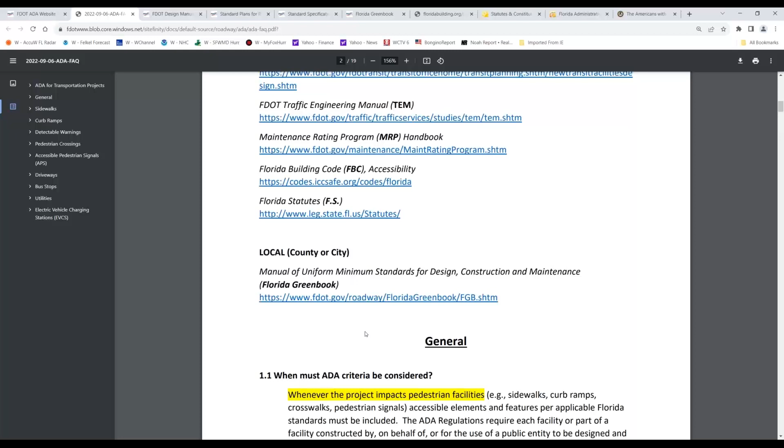I've also opened most of those links in the window you're seeing now. Here's the one for the FDOT design manual, so you could go back in time and see what the requirements were historically, as far back as the plans prep manual, which was the predecessor to the FDM. Also, this is the landing page for the standard plans.

This is the landing page for the standard specifications library. Just click on that center icon and you'll have access to the DOT spec book.

Here's the landing page for the Florida Green Book. There's lots of information available for local government entities, cities and counties. You have the Florida Building Code available from the Department of Business and Professional Regulation website, the Florida Statutes, which is a pretty easy find probably with a simple Google search, and the Florida Administrative Code.

And last but not least is the federal guidance at the federal level, ADA.gov. That's where you can find the text for both the regulations and the current applicable standards, as well as the PROWAG document, which we'll address more specifically as we move forward. I wanted to share those.

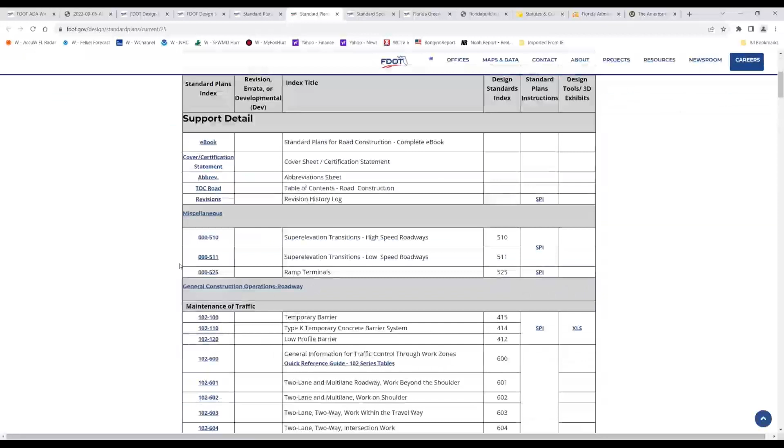And then I know that the question is referencing index 522. So 002 is the one for detectable warnings and sidewalks. So we'll click there.

And now we see on the first sheet, this is sheet 1 of 7 for this particular index. There's a stub, if you will, of the crosswalk markings that's provided in the diagram labeled curb ramp nomenclature. You can see the stubs are perfectly in line and parallel with the direction of the ramp, or vice versa.

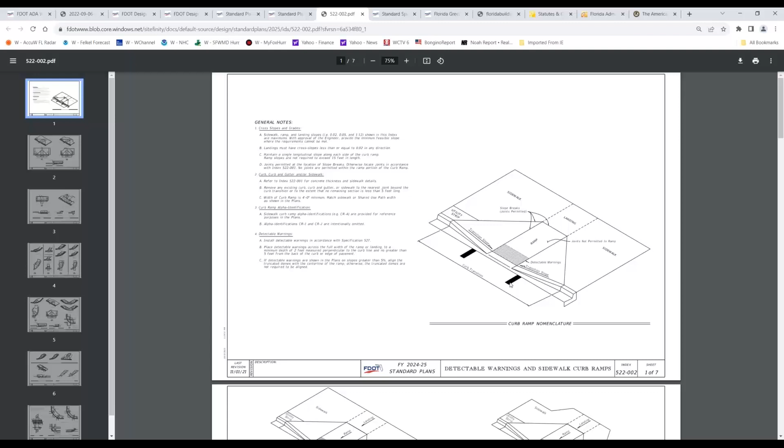I believe this is probably the only picture within this 7-sheet detail or standard that actually shows the crosswalk markings, and that's intentional because these are standard details, and the number of variations that are going to occur around the state from intersection to intersection, and probably within the same intersection from corner to corner, the amount of details are going to vary so significantly that there is no way whatsoever that the DOT could provide a standard plan solution for every possible scenario.

So the expectation is that engineering judgment is going to be applied by the engineers who are contracted by the DOT to provide design plans. And those engineers, as they exercise their engineering judgment, are going to appropriately apply the appropriate detail for a curb ramp. So I believe that answers the question.

So is 522 going to be modified to show inline crosswalks? The answer to that most likely is going to be no, not beyond what I just explained. And if not, is there a selection process? The process is that the engineering community is going to have to exercise appropriate engineering judgment for the appropriate and proper application of these standard plan details.

And then beyond that, they're going to have to expand and provide additional details as appropriate for each site-specific location. Because again, standard plan details are a pictorial representation of the absolute minimum values that can be accepted on the state highway system. Beyond that, the expectation is that the details will be provided by the engineer that are site specific.

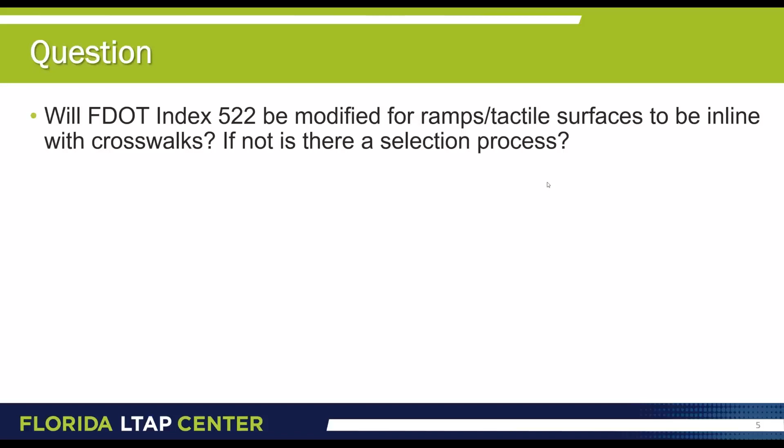Okay, the next question says, do you have suggestions to local agencies for ADA compliance during temporary traffic control and maintenance of traffic to improve safety? And the answer to that is, from a statewide perspective, I would encourage the audience to reference FDM Chapter 240. That's going to be the Transportation Management Plan chapter, and it goes into some level of detail there about what the expectations are for the engineering community and the transportation industry in general for applying appropriate details for temporary traffic control.

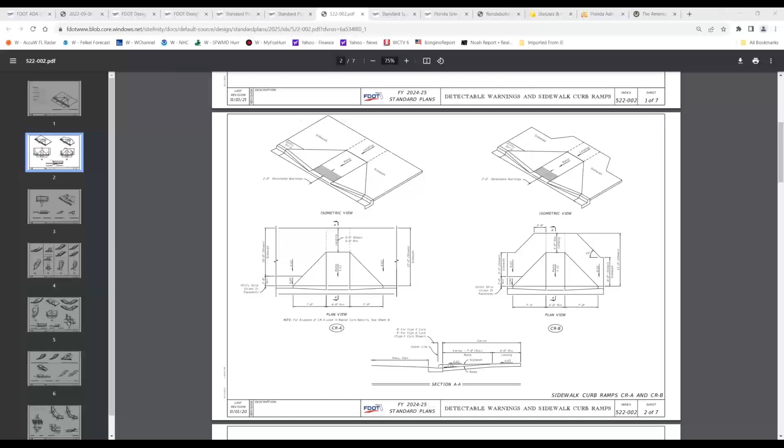Also, I would direct your attention to the specifications for temporary traffic control expectations from the DOT, and let me pull that reference up here. So I'm going to kill that one. We'll go to the standard specifications, click on the icon, and now I'm just simply going to search for Americans with disabilities. And it takes a little bit because it's basically having to download the entire volume of the spec.

But hopefully here on the screen, as I read through this, you'll understand what the expectations are. In Standard Specifications Index 102-3.4, which covers pedestrian and bicycle accommodations, the expectation is that, remember, the spec book is directed to the contractor. So the contractor is directed to provide accommodations for pedestrians as shown in the temporary traffic control TTC plans. So that first part of that sentence says very explicitly that the expectation is that there will be details in the plans, in the project plans for temporary traffic control that the contractor can build.

So this was a change that occurred, I think, about 3 or 4 years ago to the specifications that made the engineer of record for the project responsible for providing temporary traffic control details in the plans. Prior to that, it was the contractor's responsibility to provide pedestrian access during construction. But that was changed about 3 or 4 years ago. And now we have an engineering plan centric responsibility for TTC for pedestrians in the plans. And we can discuss that further if anybody has any questions about that.

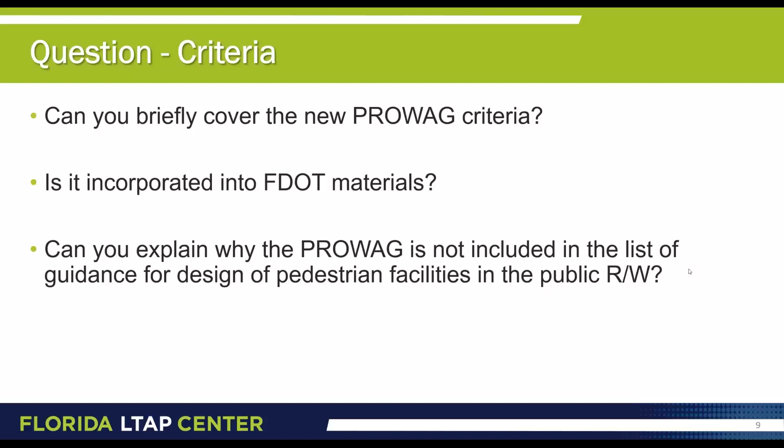Okay, the next question - and Sam and Kristen or Kiriana, if we end up getting some live questions relevant for the particular topic being discussed, you can just break in and let me know, then we can do it that way too. Hey Brad, well since you paused, I will jump in with a question that we received.

Perfect. This question is about the ladder bars crossing a wheel path: are preformed thermo required in high emphasis crosswalks, or can extruded thermo be used?

That is a very good question, and unfortunately that is beyond my area of expertise. That's getting more into a materials issue, something specific that the central office traffic engineering and operations folks can probably answer a whole lot better than I could, because I'd just be speculating. So I would definitely encourage you to reach out to our traffic ops office here in Tallahassee to ask that question.

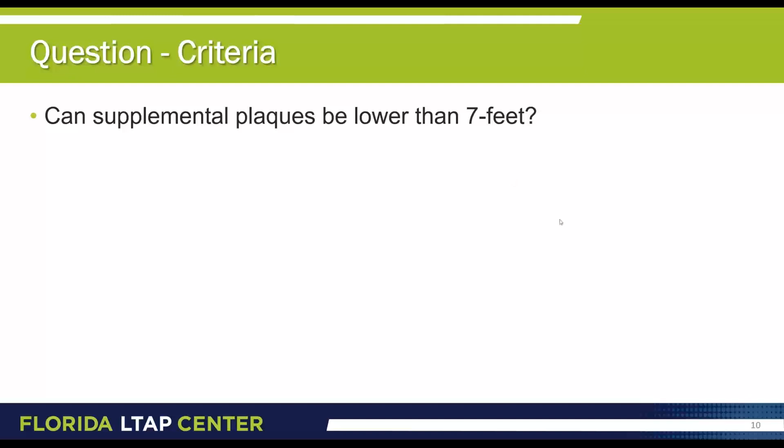So the question that's on the screen now, the question reads, can supplemental plaques be lower than 7 feet? This is specifically a reference to the vertical clearance requirements over the walking surface of pedestrian facilities.

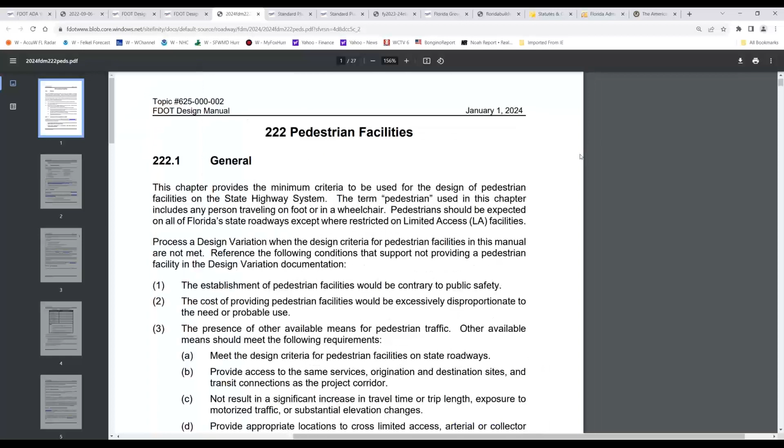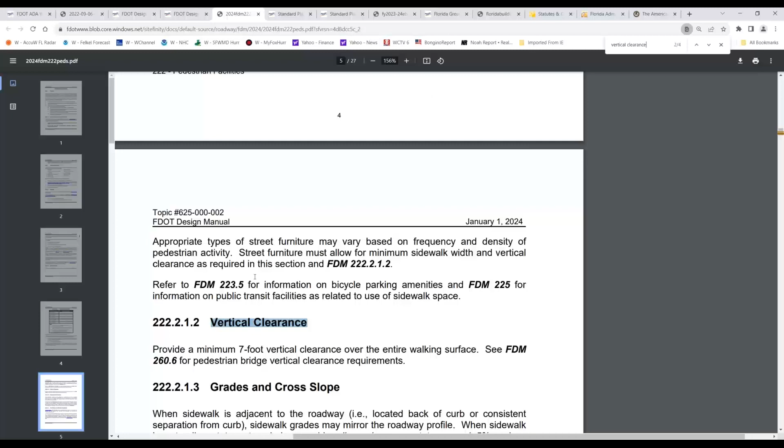So we're going to go back to the FDOT FDM, the FDOT design manual, go to chapter 222. As I mentioned before, Control F is a fantastic tool. So I'm going to hit Control F and type vertical clearance. And that brings us to section 222.2.1.2 for vertical clearance. It says provide a minimum 7-foot vertical clearance over the entire walking surface.

So essentially, to answer the question, there are no exceptions to this 7-foot vertical clearance to fixed objects. That 7-foot vertical clearance is for the entirety of the walking surface width. So if you take the neat lines of the walking surface, whether it's a concrete sidewalk or an asphalt shared use path, and you extend them vertically to a point 7 feet above the walking surface, that entire clearance window has to be clear of any obstructions. So that's nothing piercing that window either horizontally from the side or vertically from above. That entire window must be completely clear over the entire walking surface.

The next question is, what is used in the median if the sidewalk is 10 feet or more to prevent motorists from using the area to make U-turns?

This is an interesting question, and I haven't heard of this ever being an issue. To this point, maybe no one has utilized a full 10-foot width in the median pass-through. But my answer to this is that if it were to become an issue or a concern during plans development, then I would definitely encourage the engineer of record to have a conversation with the district project manager on that.

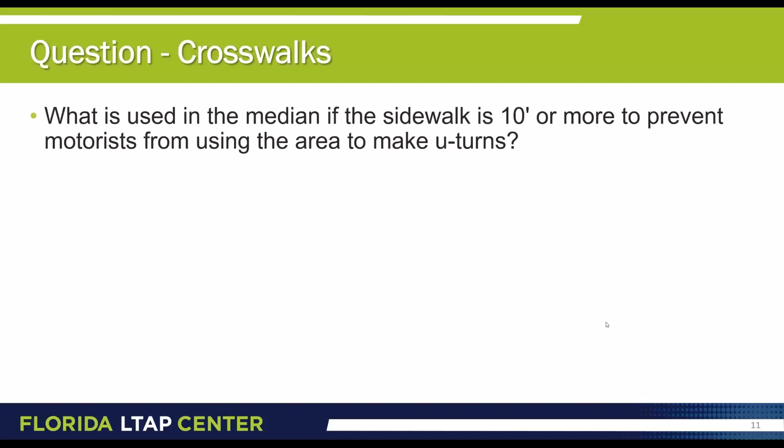So, is there a minimum distance the sidewalk can be constructed when the road has flush shoulders? That is going to be answered in the FDM. I'm going to pull that window back up, go back to chapter 222, and it's going to be an early section here. So I'm going to section 222.2.1 for sidewalk. This is the FDM, chapter 222, section 2.1 for sidewalk.

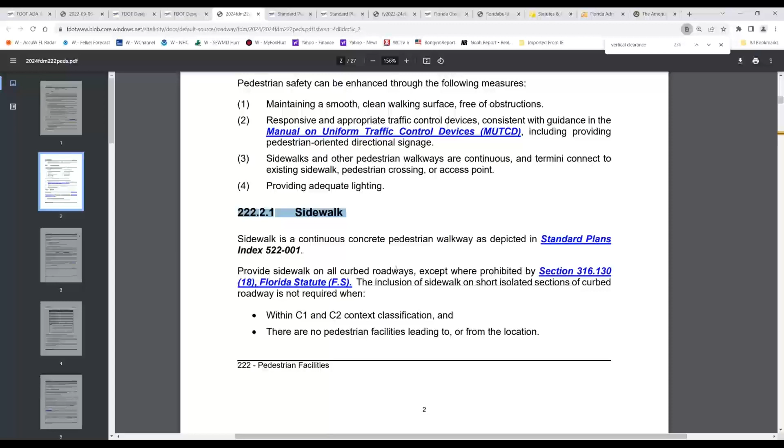And the sentence that I was thinking about is right here in this paragraph. It says sidewalk on flush shoulder roadways is not to be constructed directly adjacent to the roadway or shoulder pavement. So what that says to me is that the sidewalk for a flush shoulder roadway must have some separation from the edge of pavement. Now, there's nothing here that specifies what that separation has to be as far as distance or material. So there's flexibility given to the engineer to exercise engineering judgment and the competence in their practice to make a choice. But if you have any concerns at all, then definitely you would want to discuss that with the district PM.

And Brad, there was a question: what about vegetation within the vertical clearance? Oh, perfect. Thank you, Sam. I should have mentioned that as well.

But the clearance to fixed objects, as I stated a moment ago, is 7 feet, and that's over the entire walking surface. The clearance to vegetation, tree limbs and other vegetation types, is 8.5 feet. So again, if you extend those neat line edges of the walking surface vertically up to a point 8.5 feet above the walking surface, then that entire window encapsulated by that rectangle, that clearance window, must be free of any obstructions, either from the side horizontally or from the top vertically. Thank you, Sam.

Okay, I had a comment come in that someone saw a four-wheel truck use a median with extensive landscaping to make a U-turn, and it doesn't seem that the landscaping was enough of a deterrent for that U-turn. Well, those kinds of situations, it's impossible to design for people who are just going to ignore all norms and laws. So we do the best we can as the state transportation agency, but we can't design to prevent everybody from doing whatever level of foolishness they want to engage in. But thank you for that comment, Kristen.

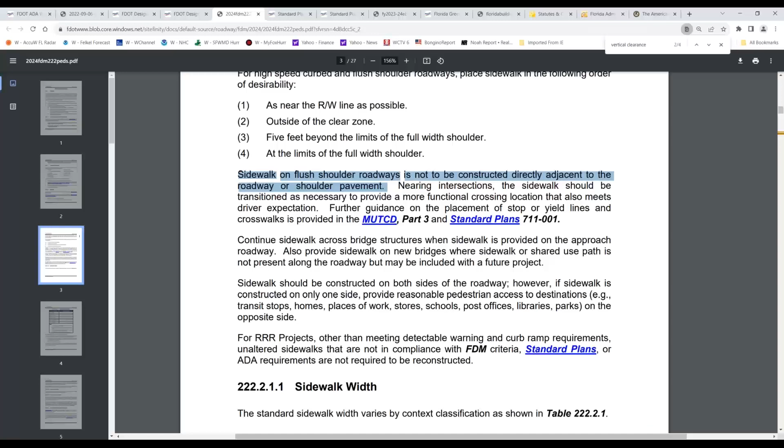With that, if you're not adjacent to the roadway, let me pull up that reference. I'll go back to chapter 222, and search using Control F for the word 'mirror.' It states in chapter 222, section 2.1.3, for grades and cross slopes, that when the sidewalk is adjacent to the roadway—that is, located back of curb or a consistent separation from the curb—sidewalk grades may mirror the roadway profile. That's for the mainline sidewalk considered adjacent to the roadway.

So to readdress the question: except for that situation where you have a mainline sidewalk adjacent to the roadway, are there any situations where sidewalk grade can go more than 5%? The answer is no. Above 5% is considered a ramp, with ramp limitations being greater than 5% and less than or equal to 8.33%. So any grades not adjacent to the roadway that exceed 5% up to 8.33% are considered an ADA ramp, and you'll have to apply handrails, level landings, and vertical rise limitations of 30 inches, I believe.

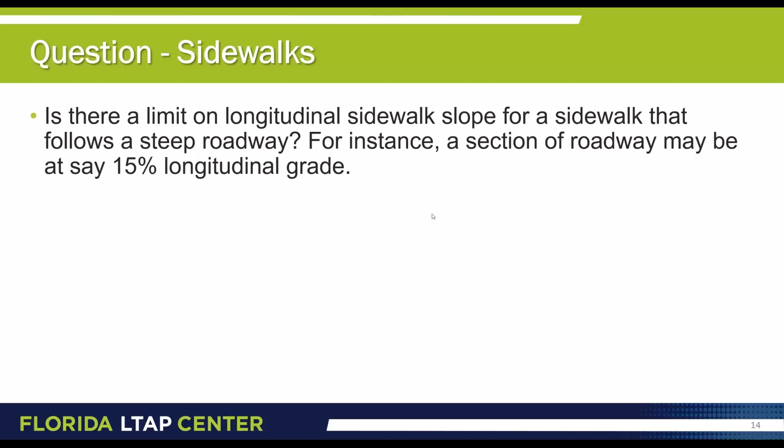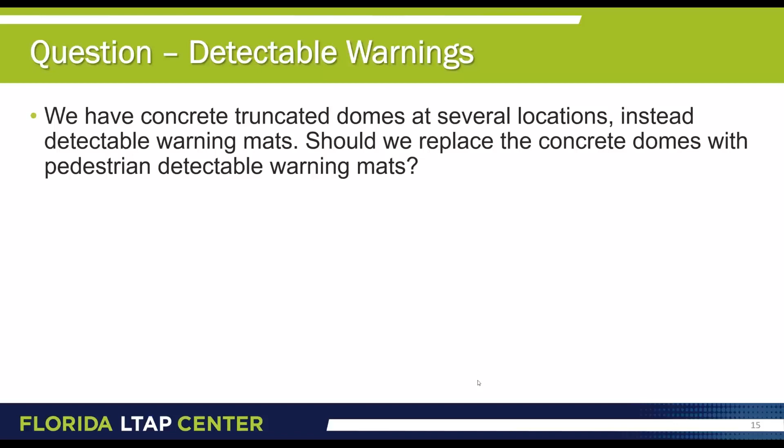The next question is, we have concrete truncated domes at several locations instead of detectable warning mats. Should we replace the concrete domes with pedestrian detectable warning mats? I would say the answer, unfortunately, with this limited information provided, is going to be it depends. And the reason I say that is because if you have a 3R project on the state highway system, then the answer, the depending part, is absolutely yes. You have to upgrade the detectable warning surfaces to current standard, because that was a historical agreement between the Florida FHWA division and the FDOT, and that memo is actually available on the FAQ document, which I'm going to pull up here.

Back here at fdot.gov/roadway/ADA, if you click on the FAQ document, which is the first resource or first link under the resources header, then you can scroll down under the national reference list here, and there is a—let's see which one it is. I have to remember which one it is. I know it was signed by, on the federal side, by Mr. Richter. So you see how useful Control F can be when you're looking for information in these documents.

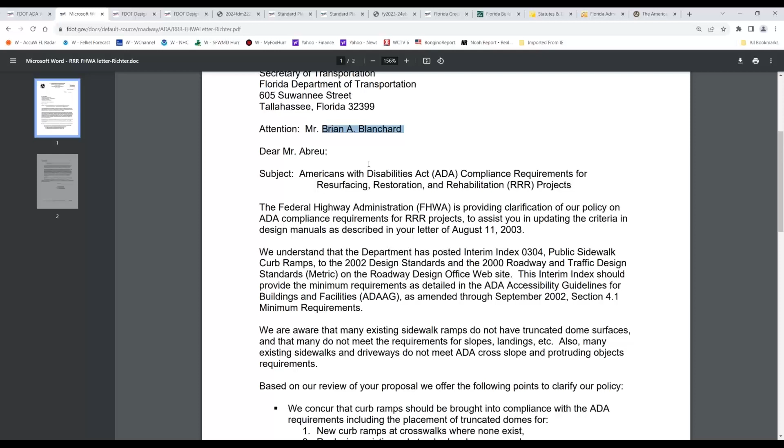Question 2.13 says, are deficient sidewalks required to be reconstructed during a 3R project? We're talking specifically now about curb ramps and detectable warnings. If you look at this memo, actually dated August 18th, 2003, so 20 years ago, it was sent to then chief engineer, I believe Brian Blanchard, or maybe he was the state roadway engineer at the time. But the secretary was Mr. Abreu, and I'm not going to read this memo out loud because now you know how to find it. But suffice it to say that the arrangement between DOT and FHWA was that curb ramps and detectable warning surfaces were to be upgraded to existing standards at such time as a 3R project went through that area.

Okay, the next question is, are detectable warnings needed at the following conditions? When upgrading a ramp by an alleyway when no stop signs are present? Well, the answer is no, and I'll show you where that answer is found in the FDM.

The next area was where a sidewalk crosses an asphalt bike path. That's going to require engineering judgment, and you're not going to find any specific guidance in the FDM for that condition specifically. But I think we addressed this out loud in the webinar on 11.2, and as I recall, the discussion was it was pretty much going to be dependent on the nature and volume of bike traffic on that bike path. If it's pretty significant, then I think engineering judgment would probably dictate that it would be appropriate to have a detectable warning surface for a sidewalk that crosses that path. But it's going to be way too dependent on the specifics of a particular location, so you're not going to find that addressed specifically in the guidance. It boils down to engineering judgment.

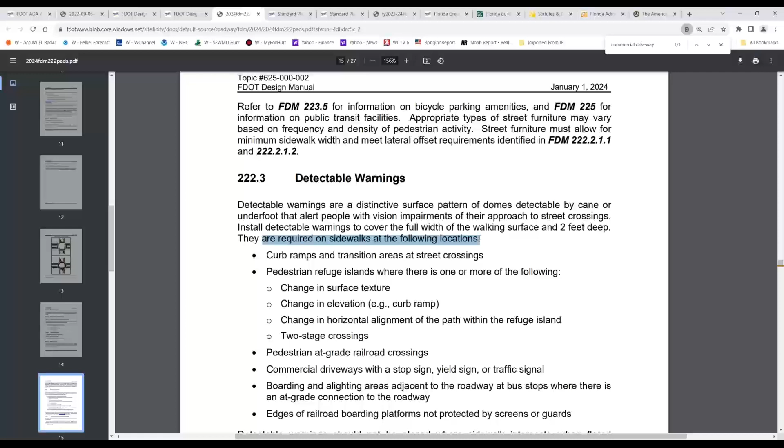We're back in chapter 222, and I'm going to use Control F, and I'm just going to type in commercial driveway. And that takes me right to what I needed to know: Chapter 222, section 3, for detectable warnings. It says, blah, blah, blah, 2 feet deep in the direction of travel. They are required on sidewalks at the following locations, and the third bullet was asking about commercial driveways. Well, here's the guidance on providing detectable warning surfaces at commercial driveways.

The first bullet asked about providing a detectable warning surface at non-signalized or uncontrolled alleyways, and the answer to that is no. The reason is because it is not a commercial driveway necessarily, but it's definitely, in the question, non-controlled. Since there is no stop sign, yield sign, or traffic signal, there is no warrant for that kind of control at that intersection. So then a detectable warning surface is generally not going to be provided there. But again, as with every situation, it's going to be dependent upon the appropriate and proper application of engineering judgment and principles.

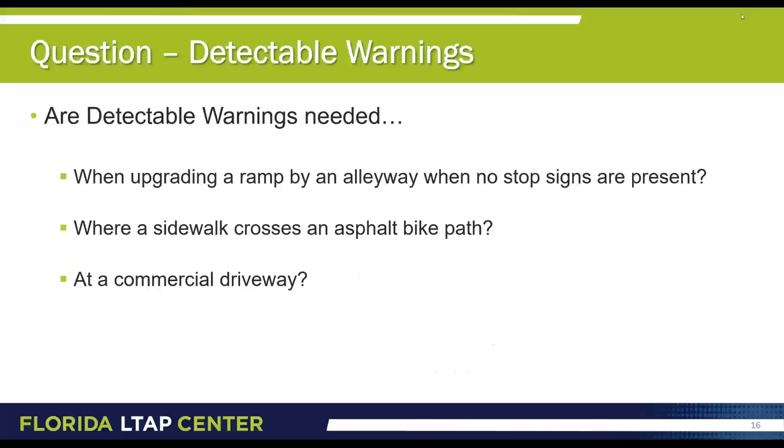The next question is: a shared use path setback from a flush shoulder roadway, is it considered adjacent to the roadway, and therefore able to mirror the grade of the roadway?

Generally speaking, the only language in the FDM—let me pull that window back up. I searched for the word 'mirror' because it's highly doubtful that word occurs more than once in the FDM. It says when it's adjacent to the roadway, and the key word is adjacent, located back of curb or a constant separation.

So the question was: a shared use path that's set back from a flush shoulder—can you follow the grade of the roadway? I would say yes, with the assumption that the shared use path is following the alignment of the mainline roadway. A shared use path cannot use that provision allowing it to follow the profile grade of the adjacent roadway when there's not an adjacent roadway.

So the shared use path is going off on an independent alignment through the woods, let's say, like the St. Mark's Trail here in Tallahassee and Leon County. There are a lot of times where that shared use path is not parallel to or adjacent to a roadway, so you can't take advantage of that provision in that case.

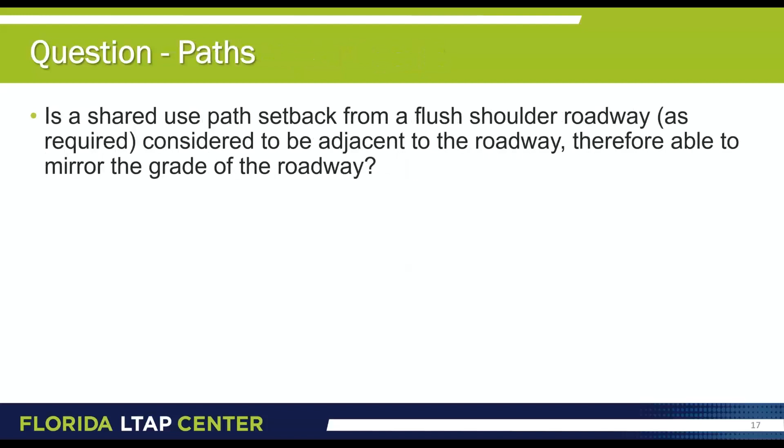Hey Brad, going back to the previous question about commercial properties—is a condo complex considered a commercial property? I would say yes, definitely, and it's all based on volume. We received a similar question before, where an apartment complex had a single driveway connecting to a state road.

The answer I gave is yes, of course you would want to provide detectable warning surfaces for that condition, because the whole purpose of the detectable warning surface is safety—we want to improve the safety and accessibility of our pedestrian facilities. If you have a large volume apartment or condominium complex with traffic flow into and out of that location, it's probably already going to be a controlled intersection, and it should definitely have the detectable warning surface.

If we go back to that section of the FDM, just to point out a distinction here—there is language that says detectable warnings should not be placed where sidewalks intersect urban flared driveways or on sidewalks that run continuously through residential driveways. So in my mind, this is referring to single family dwelling residential driveways, and not apartment complexes or condominium installations.

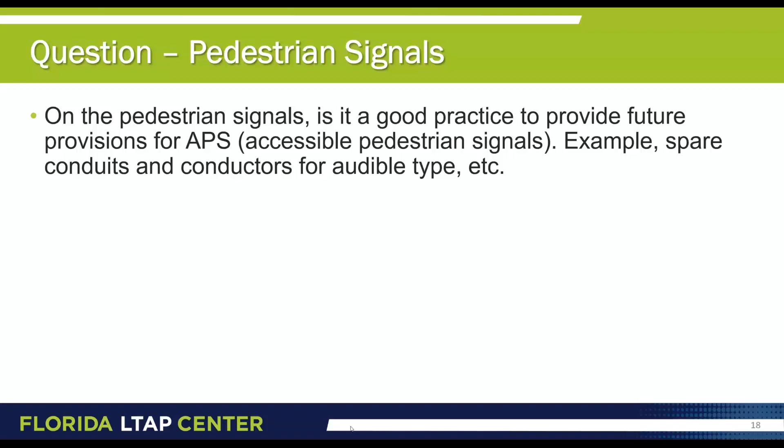I'm glad this question came in, and I apologize that I did not specifically address it during the 11.2 webinar, but I'm going to go out of chapter 222 and into chapter 232. This chapter happens to be for signalization. If you don't know the chapter numbers, I'd encourage you to download the entirety of volume 2 of the FDM and use Control F to perform your search.

But in this case, I know the answer is in chapter 232, so we'll bring that up—specifically section 6.1. And this specifically answers that question.

Section 6.1 of chapter 232, Accessible Pedestrian Signal features, says where pedestrian facilities are provided, include provisions—that is, for example, conduit, conductors, signal cables—that are needed for the future use of APS devices on all new and reconstructed signalized intersections and signalized mid-block crossing locations.

There's additional guidance available in the Traffic Engineering Manual, the TEM, section 3.7, for the installation and operation criteria for APS on the state highway system. That was a very good question, and I'm glad it was asked so we could highlight this provision in the FDM.

Next question: when would a project trigger relocating and bringing pedestrian push buttons up to compliance? Is it only if it includes signal work, or should this be included with any ramp or detectable warning work? The answer is, it depends. For a standard 3R project, signal work likely is not going to be included in the scope. But when signal work is included in the scope of a 3R project, then yes, making appropriate corrections and upgrades to pedestrian push buttons would definitely be expected and included in that type of project.

That raises the question of how this is addressed in the FDM. You're not going to find that in part 2 of the FDM for design criteria, but if we go back to part 1 of the FDM for development and processes, I'm going to bring that window up. I happen to know I want to go to chapter 114 for resurfacing, restoration, and rehab—that's the 3R chapter. Let's bring up that chapter.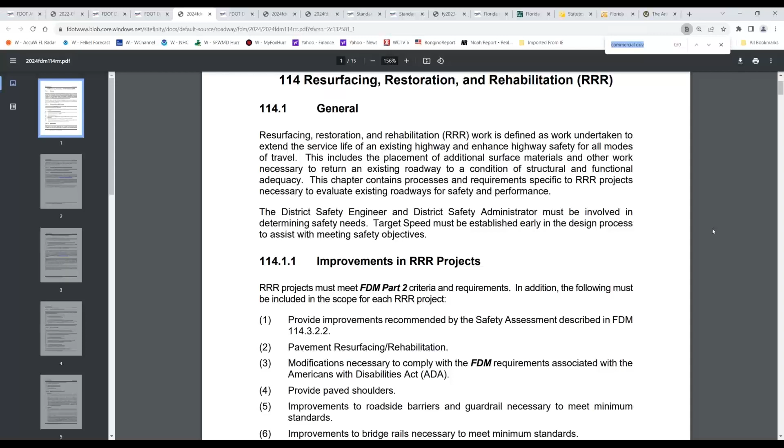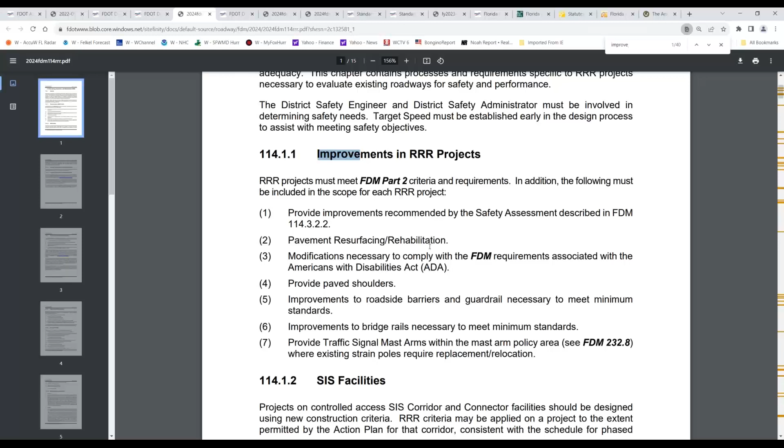I'm going to search for the word deficiencies. Or no, I'm going to search for the word improvements. Here in section 1.1 of chapter 114, there's language, and there's additional language in other portions of this chapter, but it's basic. You know what, I'm going to look for the word identify.

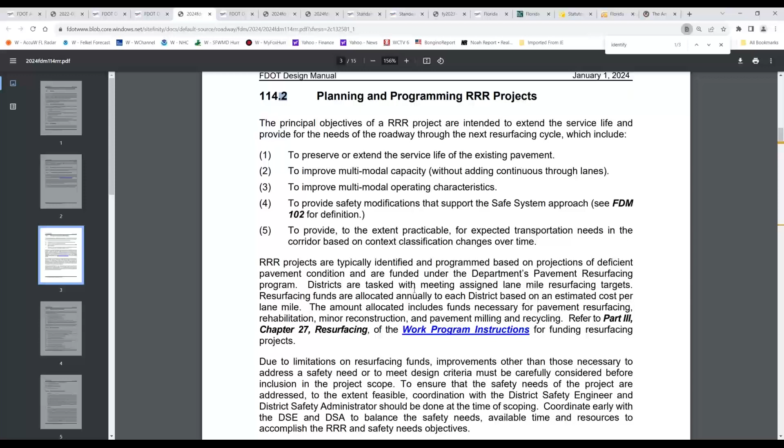This is what I was thinking of in chapter 114, section 2, planning and programming of 3R projects. It's the expectation of the FDM, and I would say a requirement, to identify potential modifications to meet anticipated future conditions. This will typically include reviewing local and district plans for desired pedestrian and bicycle transit facilities along the project corridor to identify opportunities for improvement as part of a 3R project.

So at the end of the day, my advice and recommendation would be that any engineer of record for a project should walk the limits of the project as the scope is being developed, and coordinate with the district PM to have the department present for that walkthrough as well. My recommendation has always been to take a clipboard and paper, or today's technology—an iPad or other mobile device—and take pictures and document instances where you've identified opportunities for improvement along the project corridor, and those should hopefully be incorporated into the project scope as the district has the availability to do that.

But it all comes back to making our pedestrian facilities on the state highway system accessible to and usable by persons with disabilities, and improving the safety and accessibility of our facilities for all users. So those are kind of the guiding or operating principles you need to keep in the back of your head when thinking about these types of issues.

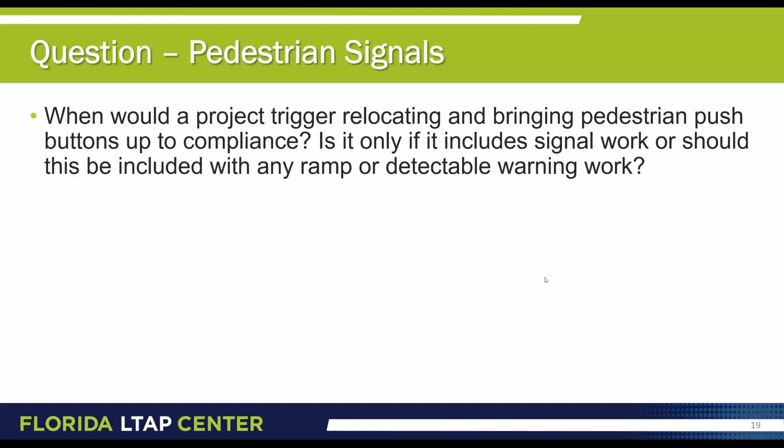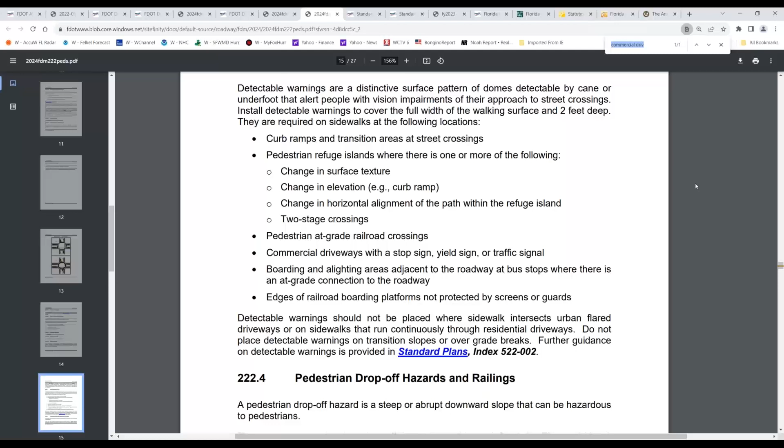The next question is, does the curb ramp's orientation on opposing ends need to be perpendicular to one another? If I understand what the question is asking, I'm going to answer it by pulling up chapter 222. If you attended the webinar on November 2nd, you may recall that I cited a particular slide, which I said was my favorite slide in the entire slide deck. This is the section of the FDM that slide was addressing.

Curb ramps should be in line with the crossing and must provide maximum slope of 1 to 12, or 8.3%. I encouraged in that 11.2 presentation for the design community and the transportation industry in general to read this 'should' as a harder 'must.' Curb ramps must be in line—and of course the reason it says 'should' is because it's not always achievable, and because it's not achievable in a lot of instances, we did not want to create a condition with the language here that would require an ADA design variation.

We didn't want to do that as often as it would likely have occurred, so it's a should condition. Therefore, when you can't do it, it does not require a design variation. But I would suggest, where we can do better, we should do better. So where the curb ramps can be made perfectly in line with the crossing direction, we absolutely should do that. But the language here understands that's not always going to be achievable, so it's not a must condition.

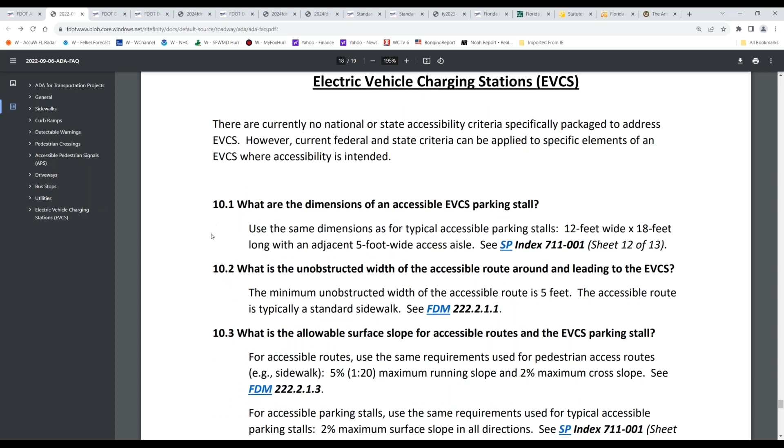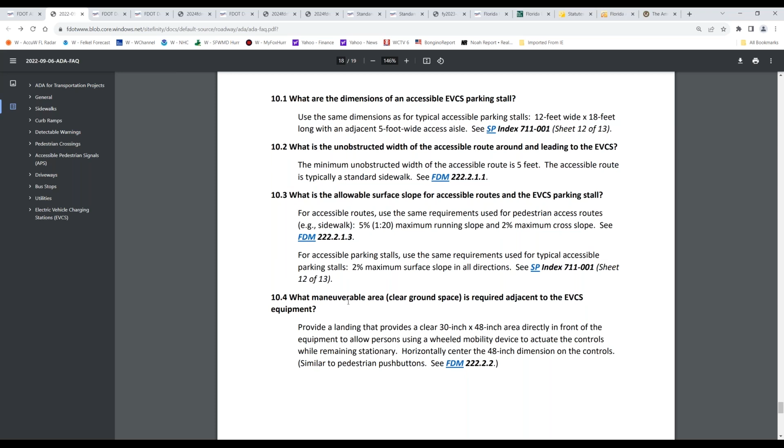That's a good question. I wanted to bring to everyone's attention that if we go back to the FAQ document, the very last category here in the bookmark section is electric vehicle charging stations, so there's guidance here on the installation of EV charging and parking. I'm trying to remember if one of these questions specifically answers where curb ramps are required, what dimensions, and how many accessible EV charging station parking stalls should be provided. A minimum of one accessible parking stall should be provided. See the ADA Standards for Accessible Design, chapter or section 228, for additional guidance.

Also, I would encourage our design community to reach out to the local jurisdiction where the project is located. If you're providing EV charging stations, there may be local codes or ordinances that come into play. Remember, the DOT standard plans are only technically or specifically applicable within the state highway system and its right of way. So if a local agency like a city or county is making reference to the DOT standards, that's good and fine, but there may be requirements that go beyond what the DOT says for particular jurisdictions and locations. I would encourage you to reach out to those jurisdictions to see if something more needs to be considered.

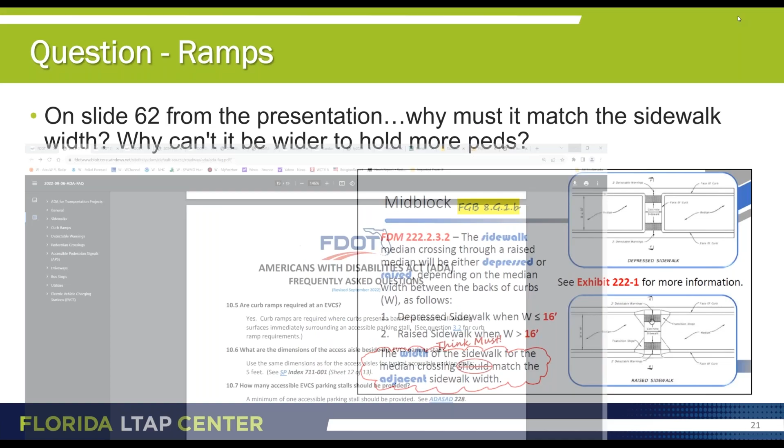Okay, with that said, if there are no more real-time questions, then we'll just continue on with what we have here on our slide. The question says on slide - okay, thank you, Kristen.

On slide 62 from the presentation, why must it match the sidewalk width? Why must the width of the sidewalk for the median crossing match the sidewalk width? Why can't it be wider to hold more peds? I believe they're probably referring to this last paragraph that I've kind of clouded with red here. It says the width of the sidewalk for the median crossing should - and I lined through that and said must - so the width of the sidewalk through the median crossing must match the adjacent sidewalk width.

The idea here is to not reduce the available walking surface width in the median from what's being provided on the connecting sidewalk ends. So the idea is to not reduce the available walking surface width. If, in an engineer's judgment, the engineer expects or wants to provide additional width, then again, where you can do more, you should feel free and able to do more where that's appropriate based on your engineering judgment.

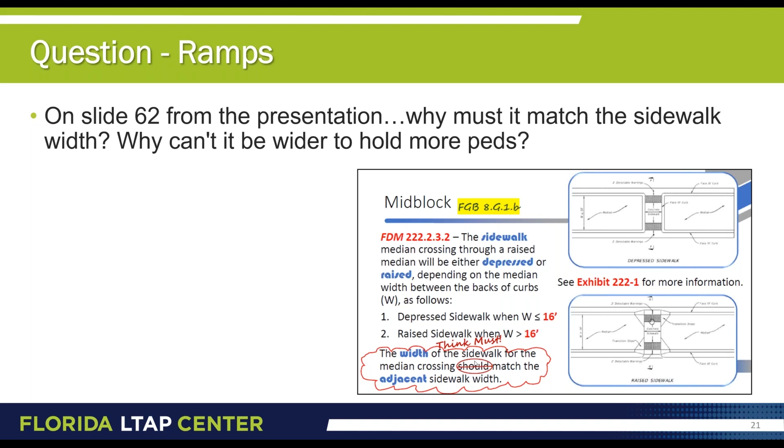Next question: considering 3R projects do not necessarily require sidewalk updates, should sidewalk tripping hazards found during field reviews, such as uneven or cracked slabs, be dealt with through maintenance or 3R design projects? I would refer you back to the language I pointed to earlier in chapter 114, and I'll see if I can bring that up here pretty quickly.

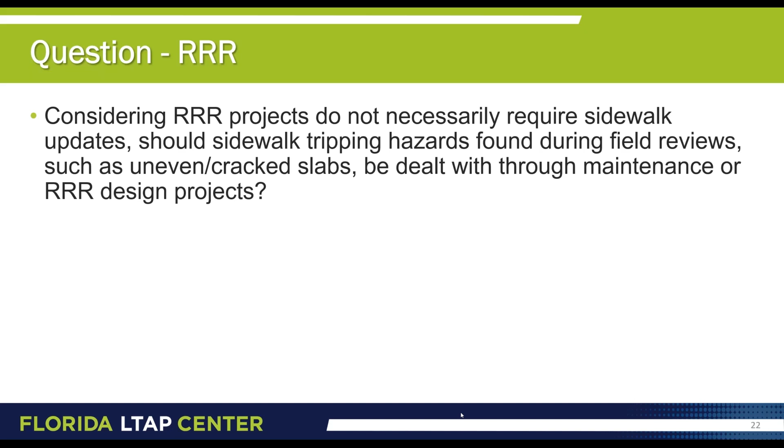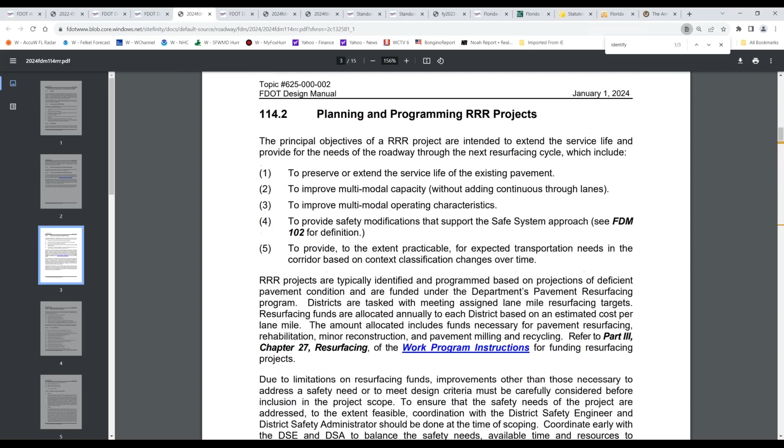That's 114 right there. So in section 2 of 114, it very specifically says to identify opportunities for improvement as part of a 3R project. This goes back to what I was suggesting earlier, that the engineer of record for the project schedule a meeting on site with the district PM, and together both the EOR and the department walk the project limits, looking for instances such as these that are mentioned in the question that can be improved as part of the 3R project. At the end of the day, it's the district's decision whether or not to improve some of those issues in the scope. So I can't give you a pat answer from central office in Tallahassee. It's going to be a project specific decision answered at the district level.

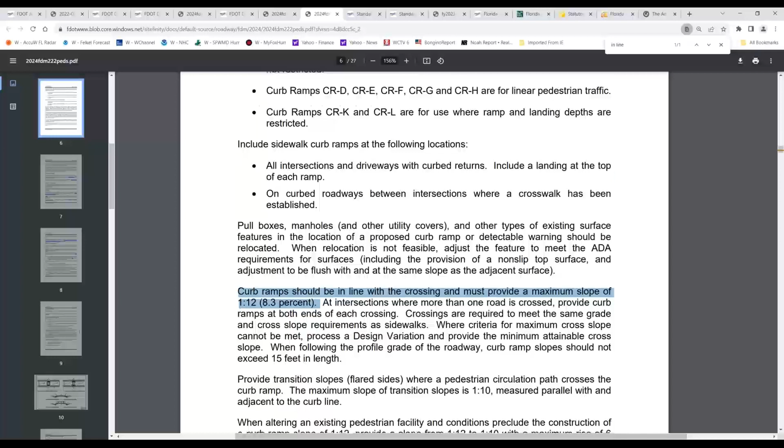Next question: on 3R projects, are driveway approaches required to be upgraded to ADA compliance? The answer is no, they are not rigorously required. But if we go to chapter 222, which I already have up here, I'm going to go to page 1 of this chapter and search for the term 3R. This is the sidewalk section that addresses how to work that in a 3R project. I'm going to go to the next occurrence of 3R, and here's where driveways are addressed in section 2.2.2.1 of chapter 222. The last paragraph of that section says, for 3R projects, unaltered driveways that are not in compliance with the standard plans or ADA requirements are not required to be reconstructed. In other words, if the driveway correction is not already included in the scope of the project, then it does not have to be corrected as part of a 3R project. That goes back to that 2003 memo from FHWA Florida Division to the FDOT.

Hey Brad, before we go on to temporary traffic control, can you jump ahead to slide 39 to one of our extra questions? I had someone in chat here wanted to see if we would get to this question. Yes, that is the one.

Are detectable warning surfaces on all stop control driveways required for 3R projects, even if the existing driveway is substandard and will not be reconstructed? That is, the existing driveway provides a sidewalk width of less than 4 feet due to the flares. This sounds like a pretty project-specific type answer, so I'm going to answer generally off the top of my head, my opinion on this. But the engineer needs to reach out to the PM in the district and get a definitive answer from them on this particular issue. But generally speaking, the answer is yes. We would want to provide correct or standard detectable warning surfaces at all controlled driveways as part of a 3R project. The reason is it goes back to the memo that I just referenced a moment ago, the 2003 memo from FHWA Florida Division to the FDOT. That was the agreement from 2 decades ago, that on 3R projects, the DOT is going to, by standard operating procedure, upgrade ramps and detectable warning surfaces to the appropriate existing standard.

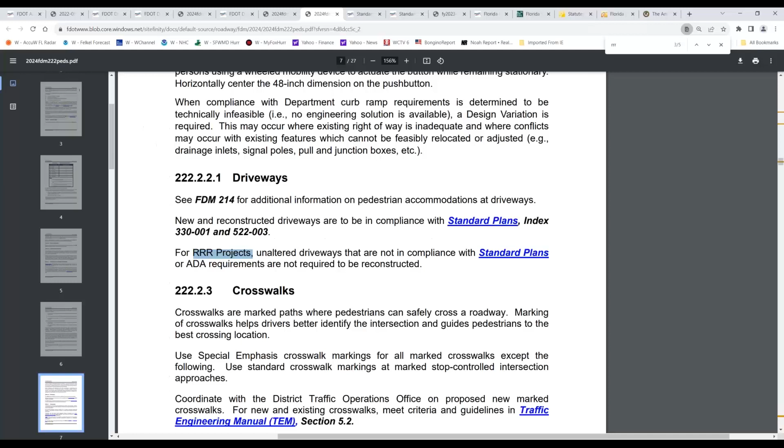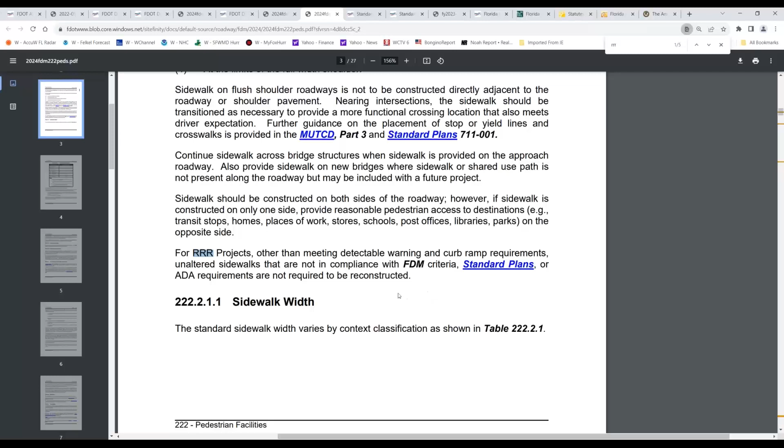Should the entire sidewalk adjacent to a 3R project road be replaced if some sidewalk segments are replaced due to drainage structure improvements, for continuity of alignment and to not create variations in surface material and potential elevation changes in the sidewalk? That's a very good question, and it sounds like it's getting into a very project specific type response that I'm not going to be able to provide. But let me say this, speaking very generally, the FDM here in section 2.2.1 of chapter 222, the last paragraph, says that in 3R projects, other than meeting detectable warning and curb ramp requirements, unaltered sidewalks, in other words, sidewalk correction was not included specifically in the scope, that are not in compliance with the FDM or ADA requirements are not required to be reconstructed.

The question is stating that there are some incremental, discrete sections of sidewalk being corrected. In my mind, that touches on what the ADA regulations refer to as alterations. So I think we're getting into the alterations provision of the federal requirements by the ADA. What that provision essentially says is that existing conditions can remain without being addressed until that particular area is altered by a construction project.

So once you start altering the sidewalk, the district needs to think long and hard about including the remaining sections of sidewalk, essentially doing the whole thing instead of just doing incremental segments. But again, that's my general response and opinion off the top of my head. I believe the district PM and possibly the district design engineer, the DDE, need to be brought into that discussion to get a more definitive, project-specific answer.

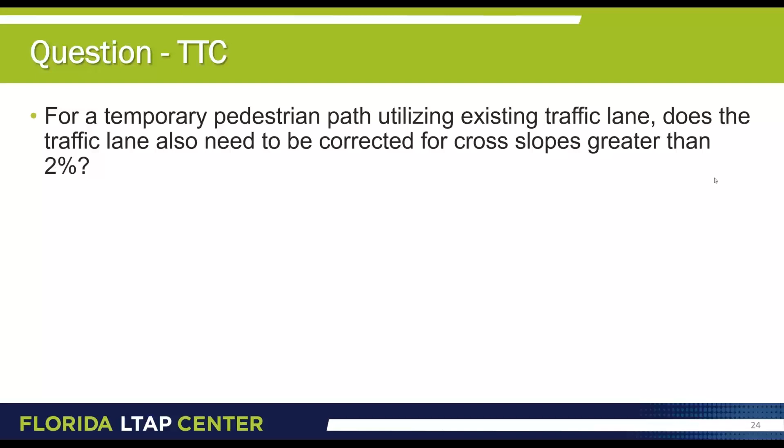So it's going to require engineering judgment to determine the best way to address those situations. I read a question similar to this before we came online today, asking if cross slopes greater than 2% also need to be corrected. I think correcting roadway cross slope for a sidewalk project is probably going to be way outside the scope and budget available for that particular project, so it needs to have a discussion with the PM and the DDE for that district. But I really appreciate that engineers and designers are thinking about these issues now, because it's very important.

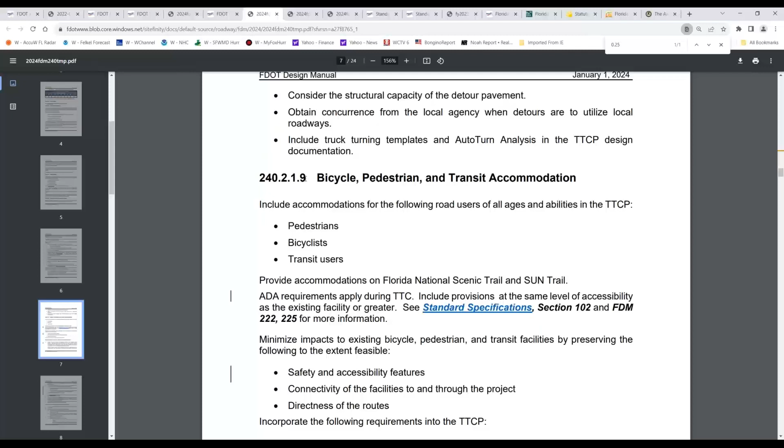Next question: where is the quarter-mile temporary traffic control diversion documented? I'm going to bring up Chapter 240 of the FDM and do a Control F search for 0.25. That's where the answer is, in section 2.1.9 of Chapter 240. Specifically it says keep detour length and diversions as short as practicable, and then it defines what's considered preferable. Paragraph A says detours should not create more than a 30% increase in length of the non-motorized facility, or not longer than half a mile for bikes or a quarter mile for pedestrians.

That's a good question. Hopefully everybody can see that I don't necessarily always have the specific citations to the FDM and standard plans memorized, but I do know where to find them pretty quickly. Keep in mind that Control F is a fantastic tool when you need to find something pretty fast.

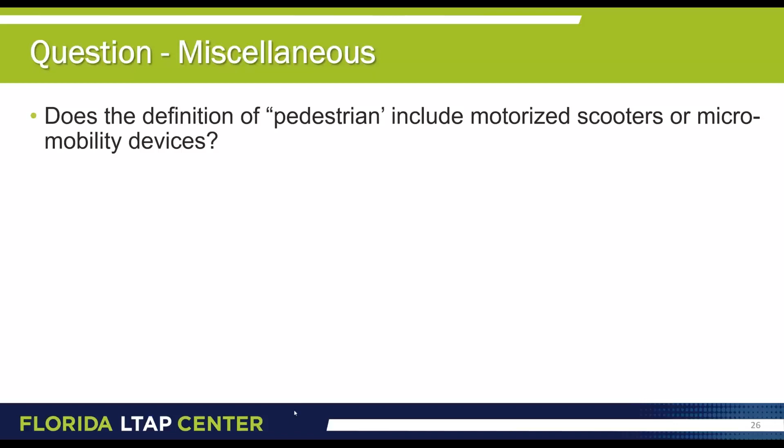The next question on slide 26 is, does the definition of pedestrian include motorized scooters or micro mobility devices? Because of the way the FDM defines it, let me bring that up in Chapter 222. I know it's on the first page. It says the term pedestrian used in this chapter includes any person traveling on foot or in a wheelchair. Well, this term wheelchair is probably pretty dated now, and we should probably update it. I'd suggest that at this time you could safely interpret the word wheelchair to mean any type of mobility aid, usually a wheeled mobility aid, but even crutches or canes would all be applicable to the spirit of this provision.

And I hate to defer questions away from myself. I like to be able to answer all of them, but unfortunately I don't have that ability or authority to do that. Reach out to the district and ask if they have any special TSPs or anything they've already used for other projects that allow for the use of APL, of MobiMat. I do know for a fact, because I've seen it in place, that District 5 has used them quite extensively throughout the counties there in D5.

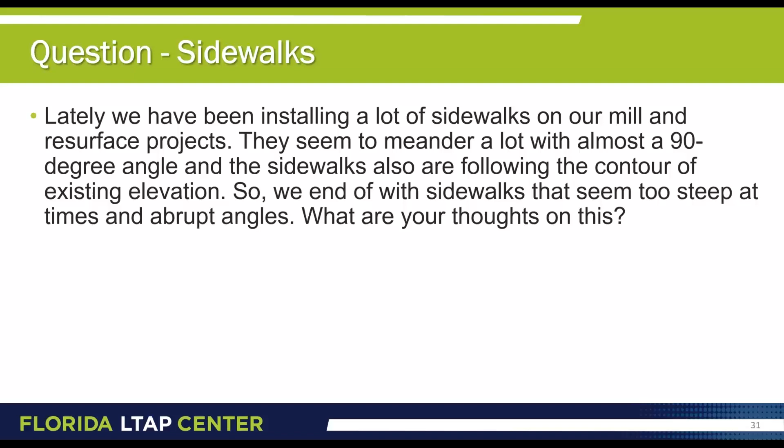Now, the general requirements for the detectable warning surface are the grid pattern of the truncated domes, the shape of the truncated domes, and the fact that there be a contrasting color between the detectable warning surface and the surrounding walking surface that it's on.

So if an engineer wants to go on their own and try to meet those requirements independent of the APL, I don't see why they couldn't try that. But I would recommend talking with the appropriate PM, either for the department or for the local jurisdiction, before you attempt that, because you don't want to get in a situation where details have been provided, it's been constructed, and then someone down the line says, nope, this is not what we want. So have that discussion early on and try to get it all ironed out before the concrete hits the dirt.

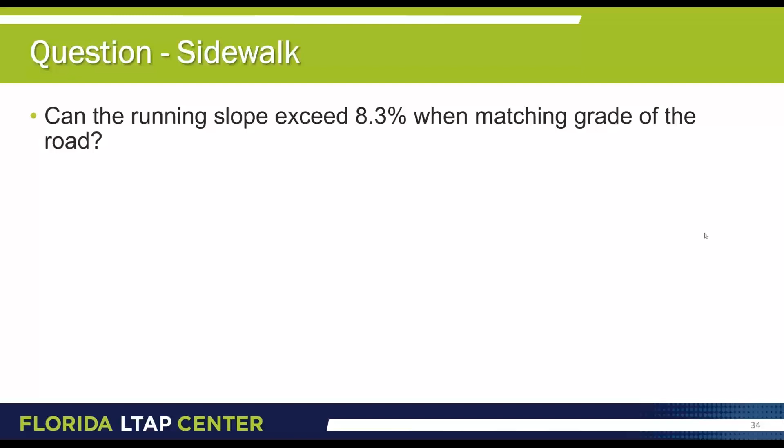Where you will get into trouble is when the existing terrain of the sidewalk location deviates from the profile grade of the roadway. Then you're probably going to get into some cut and fill requirements to make sure the sidewalk is mirroring the roadway's profile and not becoming its own independent facility.

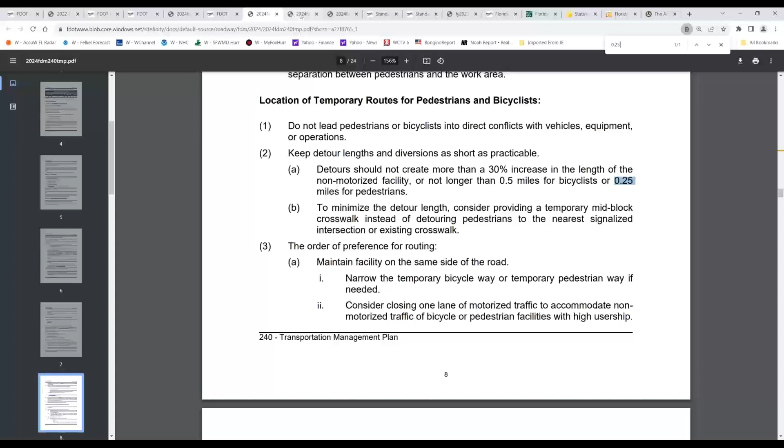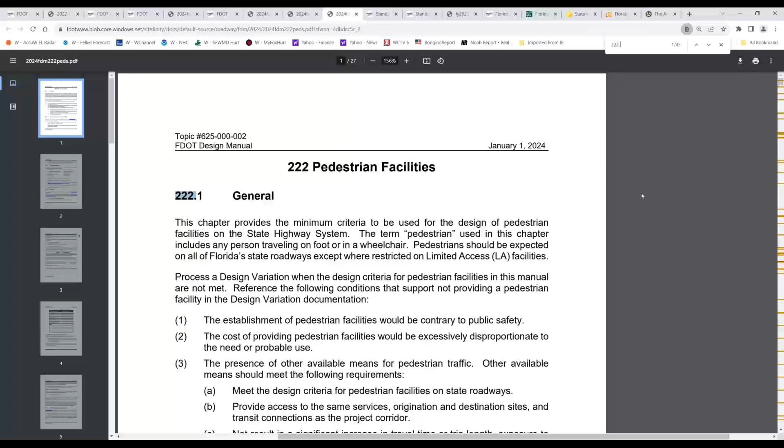Detectable warnings: it says here to install the detectable warnings to cover the full width of the walking surface, and then 2 feet deep, in the direction of ped travel. The expectation is that the detectable warning surface will extend far enough so that the human foot cannot step in a gap and miss the warning message entirely.

Some engineers might ask, well, what's far enough? A common rule of thumb, in my opinion, would be within 1.5 inches of the edge of the walking surface. So when we say it extends the full width of the walking surface, I'd say at least within 1.5 inches of the edge, or up against the curbs if there's a curb return for the ramp. The idea is there will be no gaps large enough for a foot to step in and miss the warning message.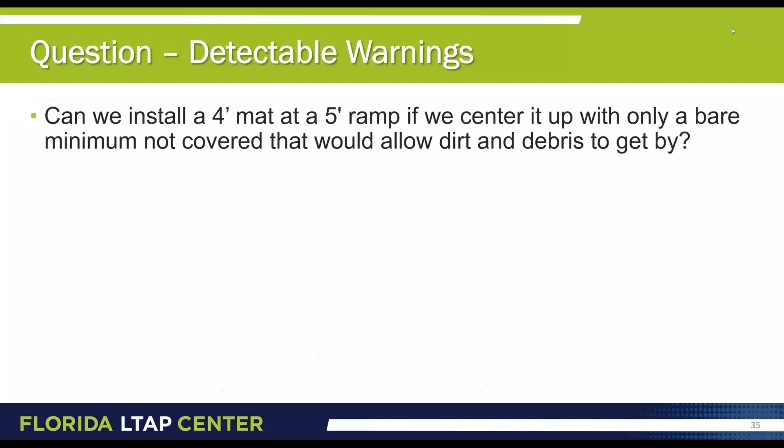Hey Brad, wanted to take a step back when you were talking about the stamped concrete. So if that has more than a quarter inch of a ridge, then that's not going to meet ADA criteria, is that right? It seems like it'd be a tripping hazard. Well, I guess it depends — if there is a vertical change in level that exceeds a quarter inch, then yes, it's going to be not compliant.

That's why the truncated dome configuration is specified in the ADA regulations and DOT standards: the height of that dome is 0.2 inches off the surrounding walking surface. So in addition to the other issues I brought up earlier, one would definitely need to make sure there are no changes in level that exceed a quarter inch — that's why the truncated dome height is specifically listed as 0.2.

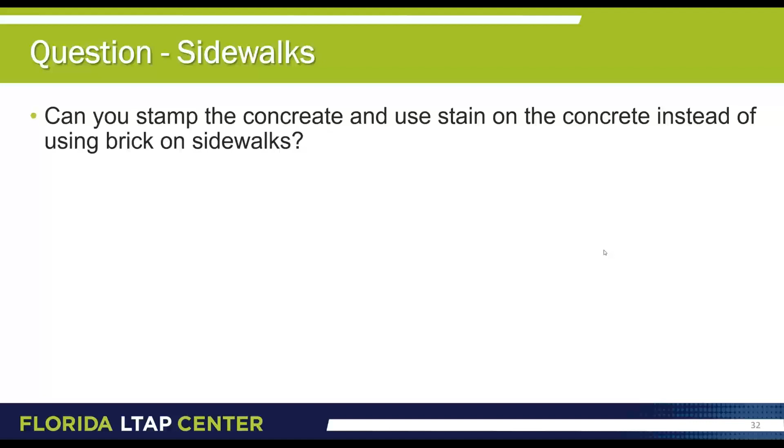Okay, I think this was the next question. Slide 36 says, when a proposed 12-foot wide shared use path abuts a commercial driveway on a state roadway, does the requirement for a 2% cross slope for the pedestrian crosswalk need to be 12 feet wide, or does the minimum width of 4 feet apply to the crosswalk? When I read this before class, it made me think, and I went to chapter 224.

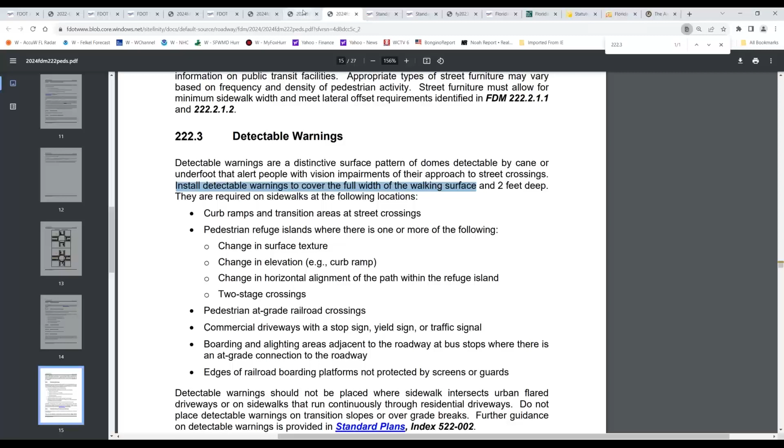I believe it is the chapter for shared use paths. So on the screen, we're going to the shared use path section in the FDM. That chapter is chapter 224. Go there, and I did a Control F search for the word width. The very first hit in section 2 of chapter 224 is labeled curb ramps, and it says provide curb ramps to be the same width as the path.

You may recall that I already pointed that out. If not today, I definitely pointed it out in the webinar on November 2nd. But the FDM in chapter 222 also has a similar provision that says the curb ramp width should be equal to the sidewalk width that's connecting to that ramp.

The entirety of the idea being conveyed by these provisions is that we, as the DOT, don't want to unnecessarily reduce the usability or accessibility of a pedestrian facility by necking down the walking surface width at our ramps. If we have a 5-foot wide sidewalk, we want to provide a 5-foot wide curb ramp. The same is true in our crosswalks, that if the crosswalk is connected to, in the example in the question, a 12-foot wide curb ramp and sidewalk, then yes, you would want the full width of that 12-foot wide crosswalk to be compliant with cross slope requirements.

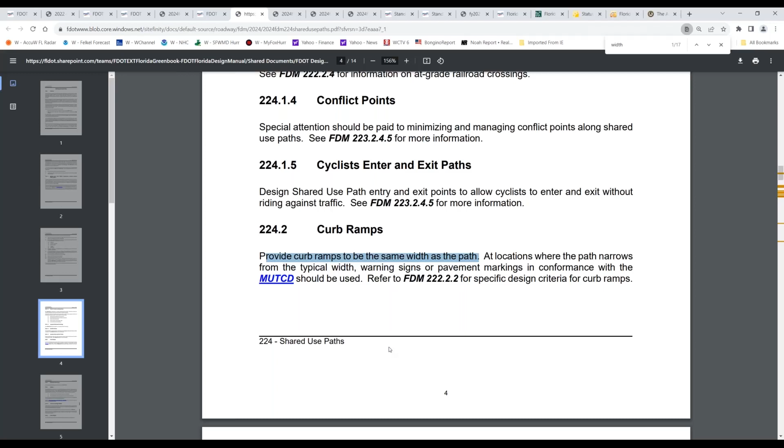I think what the questioner might be referring to here by 4 feet, which isn't even a DOT number that you'll see in the FDM for width of our walking surfaces. The narrowest walking surface allowed in a C1 or C2 context classification is 5 foot. But I think what they might be thinking about is how the ADA regulations at the federal level, and I believe PROWAG is written similarly, say that regardless of how wide the walking surface is, a minimum of 4 feet, or the current federal minimum of 36 inches, 3 feet, must be maintained.

So the current federal minimum is 3 feet. The PROWAG minimum is going to require 4 feet. The DOT minimum is 5 feet. But generally, the way the federal government thinks about it is that no matter how wide the walking surface is, at least 3 feet or 4 feet of that width is going to be fully compliant.

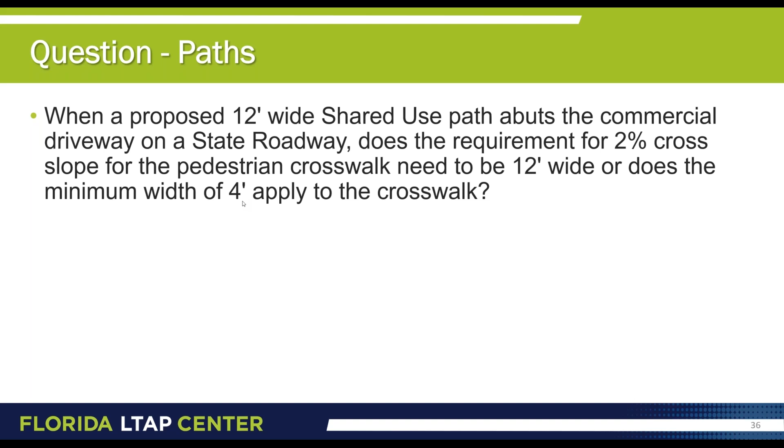Well, DOT has taken the stance that if we're providing a wider facility due to necessity from the volume in those context classifications, then we want the entirety of the walking surface to be compliant with the 2% cross slope. The same would be true in the crosswalk. Hopefully that answered your question. I apologize if I rambled there, but I was trying to think through how to explain that.

On slide 37, the question is, would it be good practice to keep all slopes at 1 to 12 for simplicity? I'm guessing this is probably from an engineer, because I'm an engineer, and I think in these terms of trying to standardize and make things as simple and consistent as possible. I agree with the whole idea of providing consistency in our elements.

But when it comes to our slopes for curb ramps, you might have heard me say on the 11.2 broadcast that engineers should endeavor to provide the least slope achievable when it comes to any type of curb ramp or sloped walking surface from one elevation to another.

Engineers and the entire transportation community should be thinking of providing the least slope achievable. A ratio of 1 to 12 should be considered an absolute maximum, but not a desired standard grade or slope for our curb ramps.

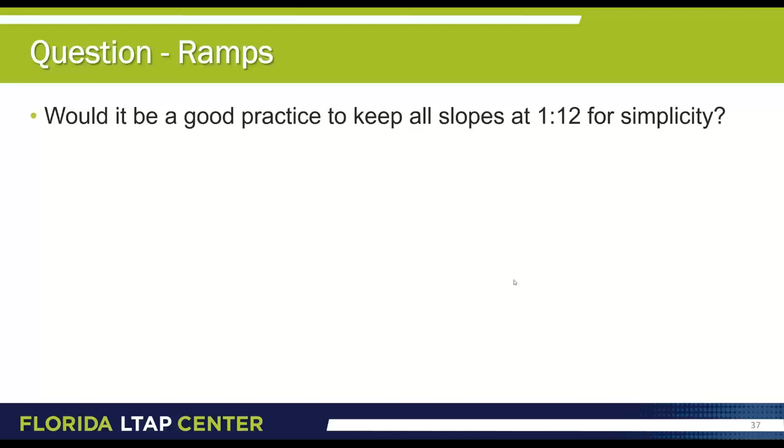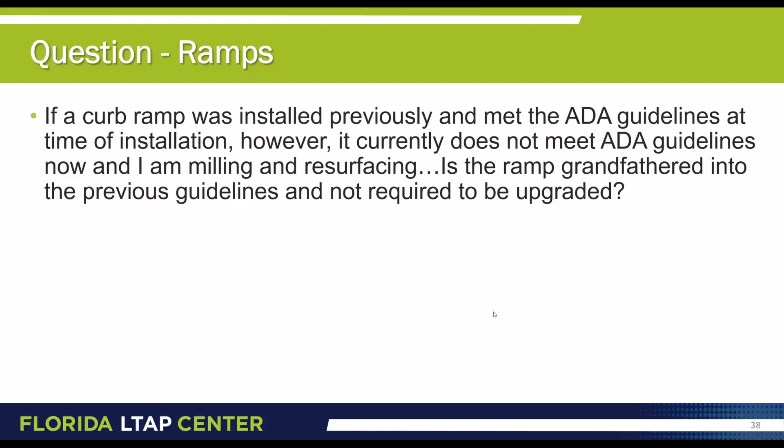Slide 38 asks: if a curb ramp was installed previously and met ADA guidelines at time of installation, but currently does not meet ADA guidelines, and we're milling and resurfacing, is the ramp grandfathered into the previous guidelines and not required to be upgraded? The answer is no. It goes back to the 2003 memo from FHWA Florida and FDOT, where the agreement was that in a 3R project, all curb ramps and detectable warning surfaces will be corrected to existing standards.

Slide 39 is one we covered earlier, so I'll skip over that. I did have a question from earlier though: if just the curb adjacent to the driveway is being replaced in kind, does that force upgrades to the existing driveway? So just the curb at the driveway interface is being replaced.

I think in that situation, and I hate to do it, the answer is going to be to have that discussion with the appropriate jurisdiction's project manager. I think you're probably touching on, if not delving completely into, the alterations provision of the ADA regulations. So if you're adjusting the interface point of the mainline roadway with the driveway, then probably the alterations provision is going to necessitate correcting the sidewalk through that driveway. But I think it's going to fall primarily to engineering judgment and a district decision. I hate to keep deferring to the district, but for project specific issues, that's what I'm compelled to do.

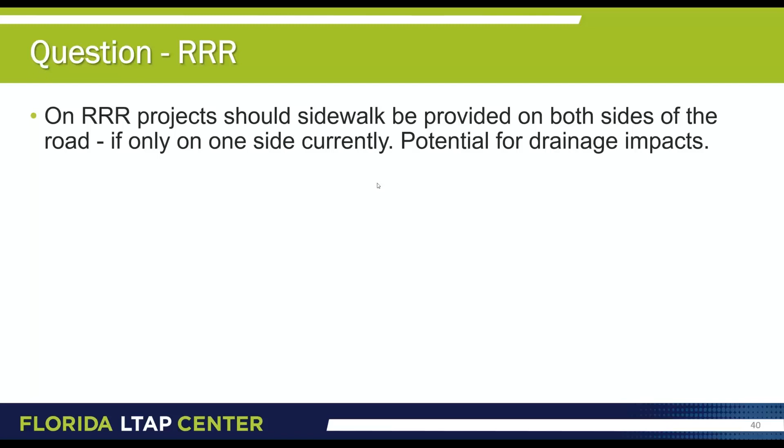Next question: if there's sidewalk on only one side of the road, is it required? That's pretty much the same question. To confirm, if milling or resurfacing is being done within the corridor, do we not need to upgrade non-compliant sidewalks except curb ramps at the intersections? The answer generally is yes, unless the district has opted to include sidewalk correction in the scope.

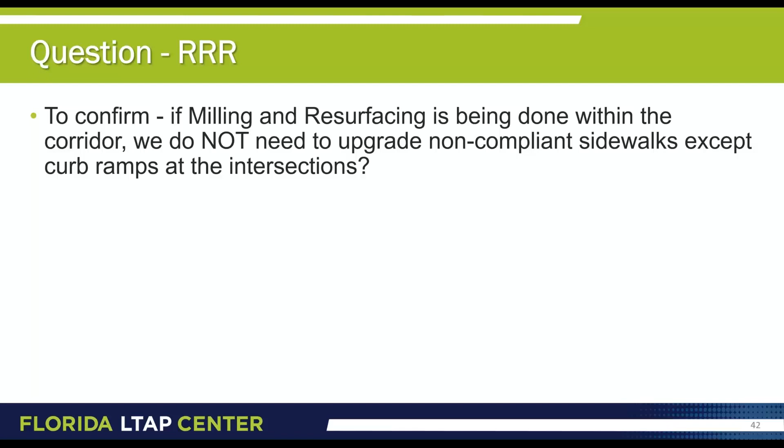Just to verify, on 3R projects, are driveway approaches required to be upgraded? Same answer: generally no, unless the district has specifically included that in the scope.

Page 141 shows putting an LCD across the sidewalk, but then there's an area past that where there's an open sidewalk. If there's somewhere a person has to get to on foot, such as a doctor's office, now you've blocked it off. Having the one at the actual closure makes sense, but the advanced one does not.

Yes, this is where, again, the whole idea of standard plans details is that they are a pictorial representation of the minimum expectations on the state highway system. Application of standard plans does not relieve an engineer of record from providing the appropriate details to make the site-specific condition operate the way it's supposed to. Engineers are not alleviated from their engineering responsibility just because a standard plan is shown a certain way.

Appropriate details need to be provided to make it functional.

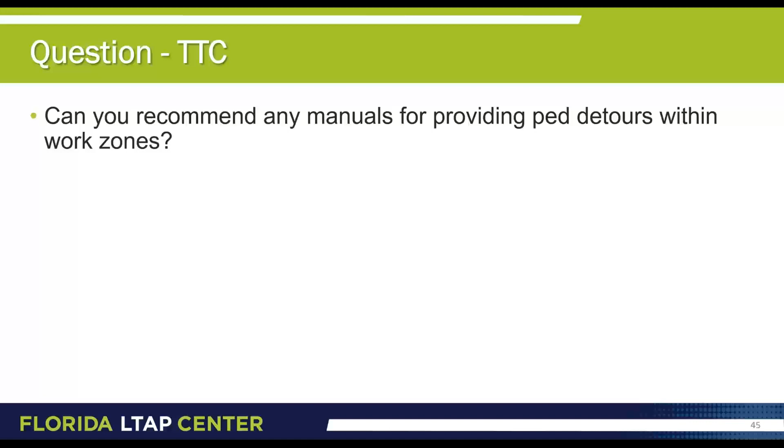Can you recommend any manuals for providing pedestrian detours within work zones? I can't specifically, but I would encourage referencing chapter 240 of the FDM, as well as our standard plans index 102. But ultimately the engineers of record are going to have to reconcile the necessary requirements and make them work.

Does the FDOT district in Tallahassee allow Creative Outdoors to install benches to be placed in the grass at a bus stop, or because of ADA have they been removed? Long story short, when it comes to benches that appear on sidewalks within the state highway system, they have to be there by permit. If placed without a permit, the district by statute has to notify the apparent owner of the bench about its improper location.

And there's a certain time period—I want to say it's 3 days, it may be 5 days, it may be different, I can't remember the exact period, but there's a statute that governs this. Essentially the DOT will make the notification, wait the appropriate statutory length of time, and then the DOT can remove it ourselves and take it back probably to a maintenance yard.

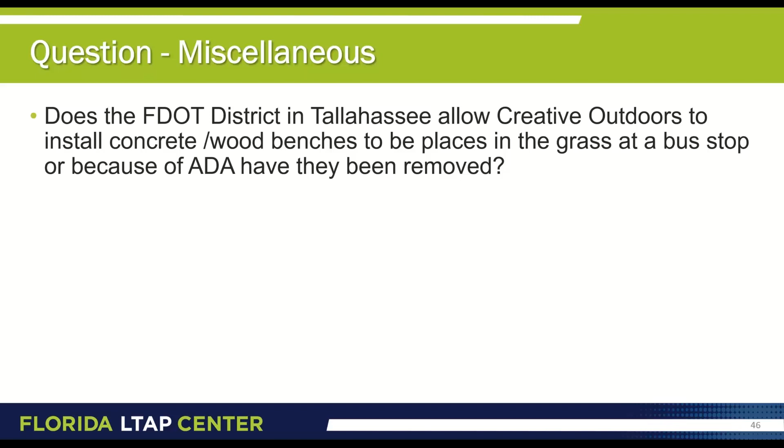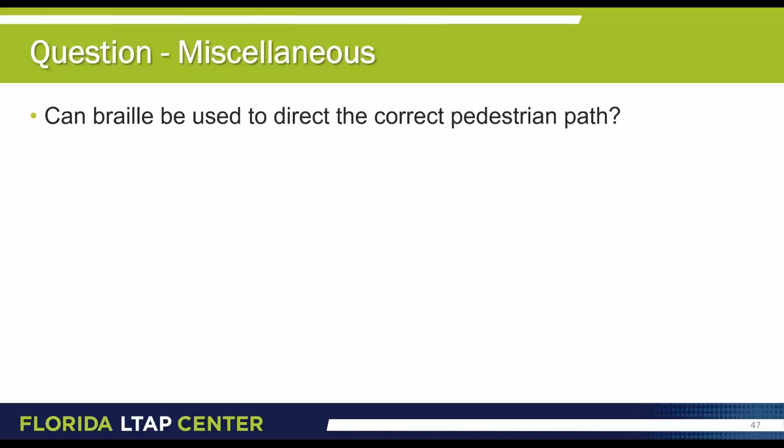Can Braille be used to direct the correct pedestrian path? That's a good question, and I think for national consistency, the best reference for that condition is the MUTCD. I'm not aware of anything in the FDOT design guidance or standard plans that calls for or permits Braille, but it's something that could be considered as long as it works with the national requirements of the MUTCD and the DOT district is amenable to that approach.

And that is the end of the slide deck, Kristen.